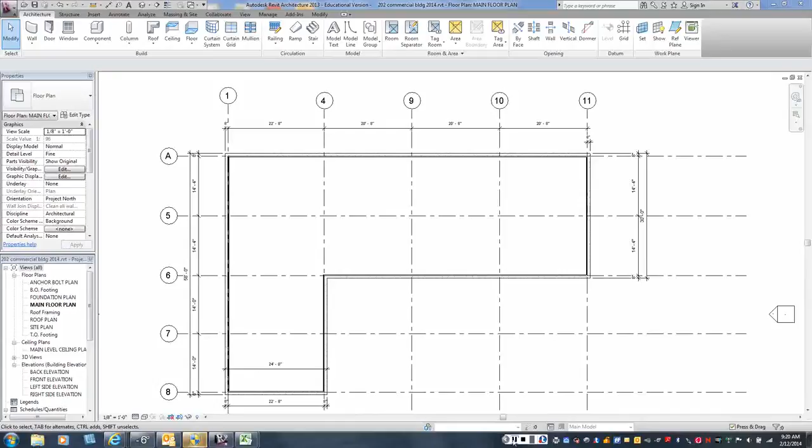We're going to talk today about creating your height elevations on your building. And we talked about the building being modular, so it's masonry construction, so we have to be modular on an 8-inch increment horizontally, right? And we have to be on an 8-inch module going vertically as well. So let's just look at maybe an elevation of our building.

And right now, mine defaulted to these numbers, okay? Saying that level 1 was the main floor plan, and my roof was set at 12'8". I don't know what yours defaulted to, but let's see, does 12'8" work out on an 8-inch module? Yes, okay? You could divide 12'8" by 8 inches, and you would come out with an 8-inch module. So let's say that that is the height of our building. Let's see how that would work backwards to come up with a ceiling height.

So what kinds of things on this type of building do we have to take into account as far as how much lower would the ceiling be than that? So it's a masonry building with a flat roof, right? And when you look at flat roof buildings around, you don't see the roof at all, right? Because the roof is actually lower than the top of the wall. There's what's called a parapet, right? Everybody knows what a parapet is? It's when the exterior wall extends above the roof. That's a parapet. So let's assume commercial construction, what ceiling height would you recommend?

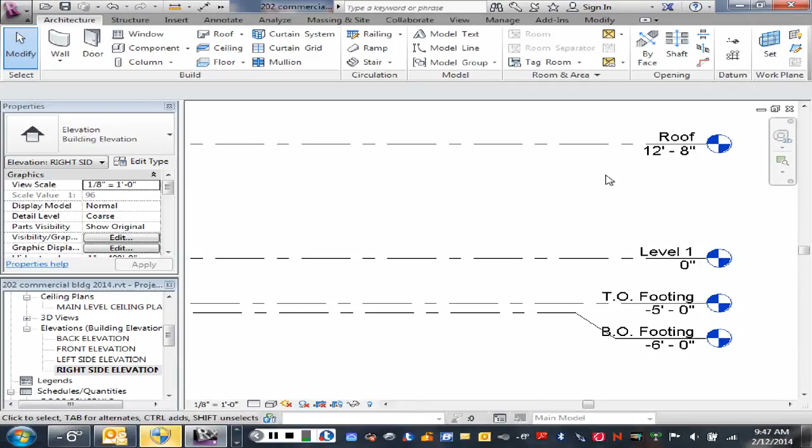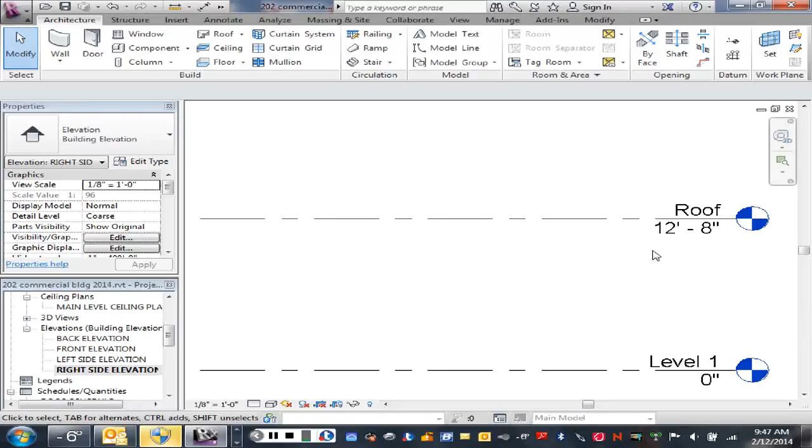Okay, so let's just assume that we're going to have a ceiling height of 10 feet. That would be a suspended ceiling like we have here. And then above that suspended ceiling, we're going to have our structure of our building, which are steel beams and bar joists and things like that, right? So we'll be looking at that here in a second. Okay, so at this point, we'll say that at a minimum, your roof's going to be at 12'8". That leaves us, from a 10-foot ceiling, 2'8" to incorporate steel beams, bar joists, a roof system and a parapet wall above the roof.

Okay, so this is an example of what your structural cross-section sheets could look like. So you'd have a main cross-section through your building over here in the upper right corner, and then a blow-up of the exterior wall where it meets the roof over here. So, like I just mentioned, if our overall wall was 12'8" to the top of this exterior masonry wall, then the things that are getting covered up are the steel beam that has to be incorporated into the wall between columns, and then the bar joists that sit on top of that beam. Now, steel bar joists are different than wood joists, in that they are typically top chord bearing bar joists. Okay? So they hang off the top of the beams.

And we'll talk about that more when we get to drawing our sections, but the height of the bearing point of a bar joist depends on the depth of the bar joist and the length of the bar joist. But for this building, due to our less than 30-foot spans probably, that height of that bar joist bearing is going to be 2.5 inches. That's pretty common up to a 30-foot length. And then once the lengths get longer than that, that height starts getting bigger. It might be 4.5 and 5.5 and so forth. So at this point, we'll assume that that height's going to be roughly 2.5 inches above the steel beam.

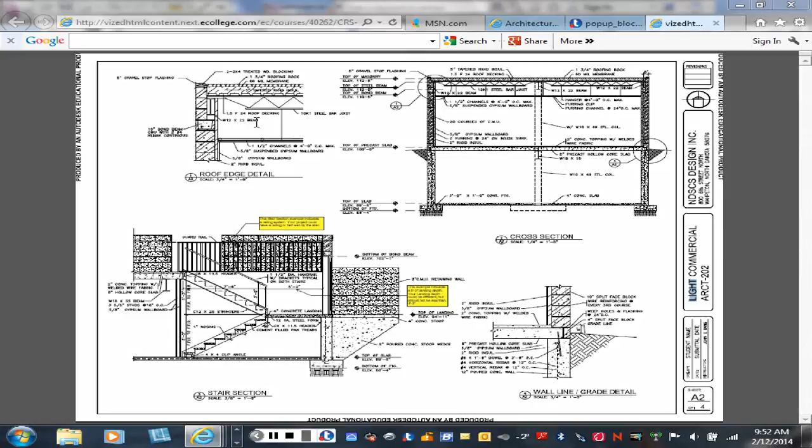So for the purpose of drawing your floor plan, let's assume at this point that our roof level is going to be at 12 foot 8. That'll give us our roughly 10-foot ceiling height. And some of you may have decided to raise the center part of the building or even go to a 2-story, you'll have to create a higher level, obviously, right? So let's go back and look at our plan a little bit.

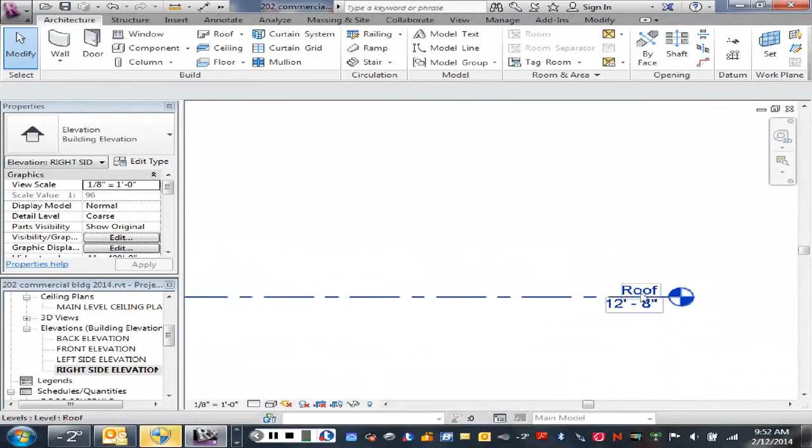And let's say that, dealing with like the sketch I created yesterday on the board here, I wanted to raise that center part of my building, which was right in this area here. I'm going to go over here and I'm going to click on that name roof, and I'm going to say roof-1 maybe, okay? Because I'm going to put another roof a little bit higher.

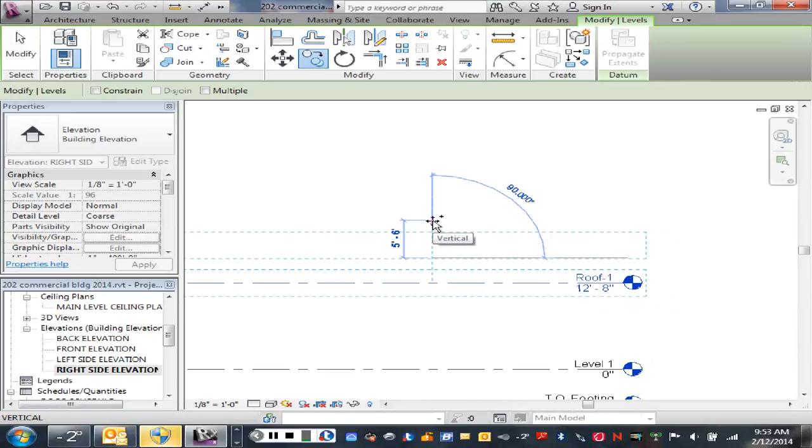So then I'm going to click on this level and copy it, and I'm going to say I want it up, we'll say 5 feet higher than the other roof. Okay, and that automatically will default to roof 2. Okay, and it tells me that it's 17.8 above the other one. So at this point I just guessed at what that should be.

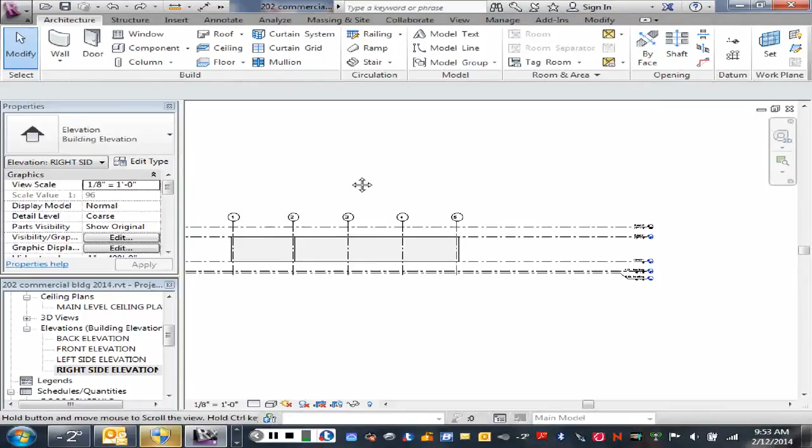After zooming out a little bit and looking at it, whoops, undo that. After zooming out and looking at that, I can kind of tell that's probably a little bit too tall. It's probably going to make my building look a little too tall, so I'm going to change that probably to maybe 15.8. And that would be more appropriate for my building, but your buildings could all be a little bit different.

That would be the level of, let's say you're going to put a standing seam roof or a sloping roof up there. That would be the height of the low end of that roof, and it would peak up above that. Okay, so that would be the bearing point of the trusses or whatever you're going to have on that upper level. Okay, any questions about that? Okay, let's go down then from this level down.

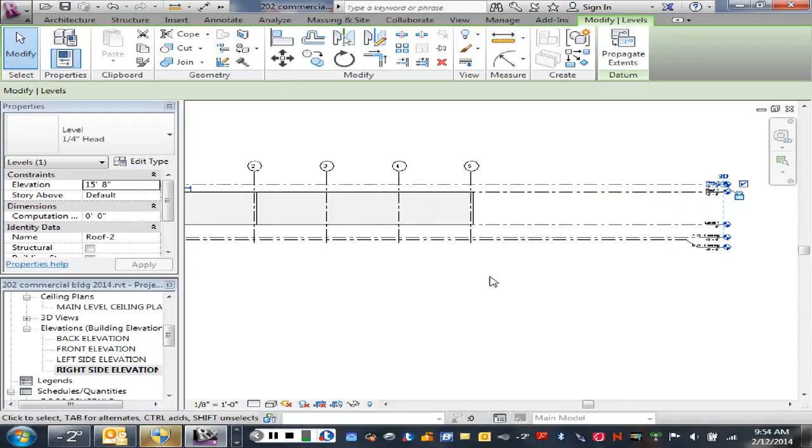We talked about putting a basement in this building. And if we put a basement in this building, it's commercial construction, so one option would be, again, to go with bar joists and beams and put a metal deck on that and then pour a concrete floor on top of that. That's one option. The other option is to go with precast concrete planks. You all familiar with precast concrete planks? Probably talked about that in your methods and materials class a little bit. Okay, so we're gonna opt for that.

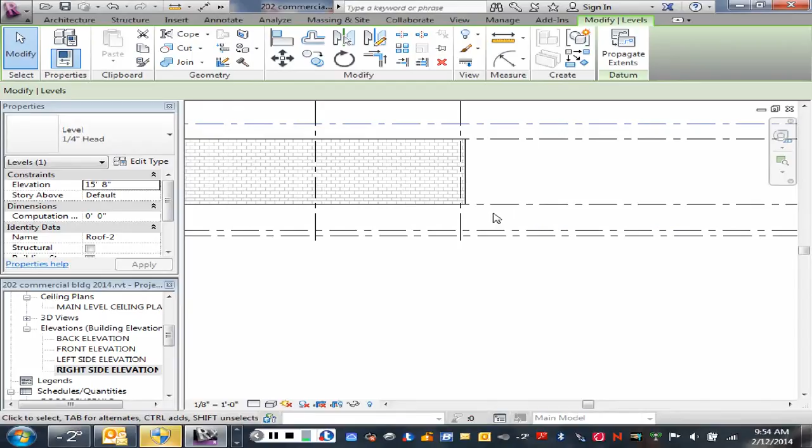So we're going to say that our precast concrete planks are going to be 8 inches in depth and thickness. Okay, with an 8-inch precast plank, we can span up to about 30 feet roughly. But again, we can look that up and find that information out. With precast concrete planks, you're going to be required to have a topping of concrete over top of that because the planks are irregular on top. So you're going to have to pour a topping on top of that to level them out.

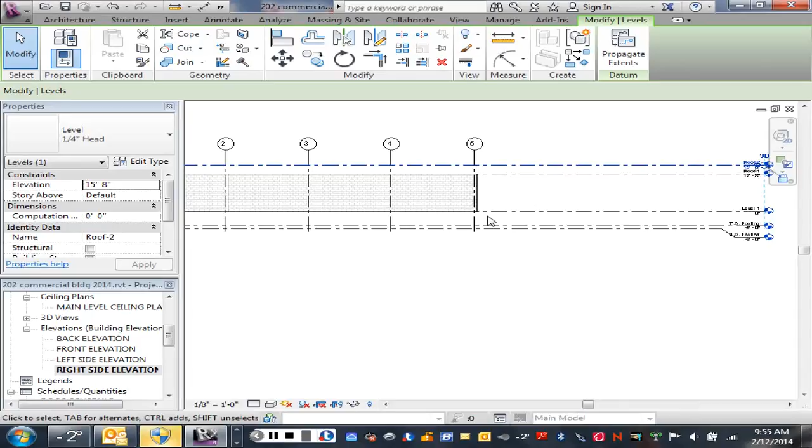So level 1 will be the height of our precast. We'll pour topping on top of that, which is going to be 2 inches thick. Now that might affect our ceiling a little bit. Maybe our 10-foot tall ceiling now became 9 foot 10, because of that. That's not a big problem. We can solve that later.

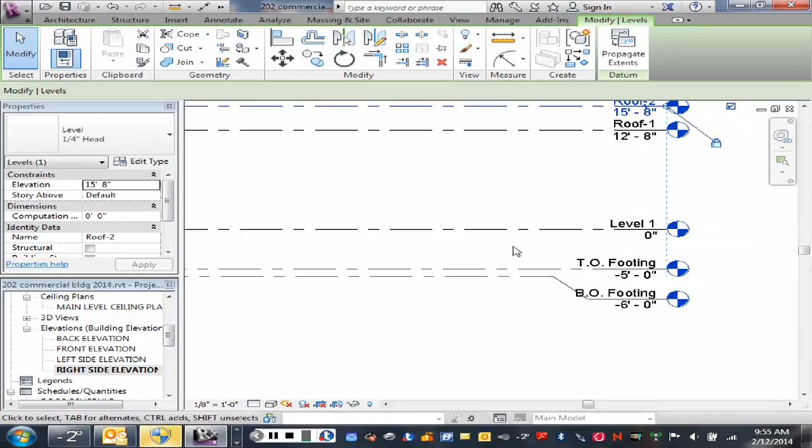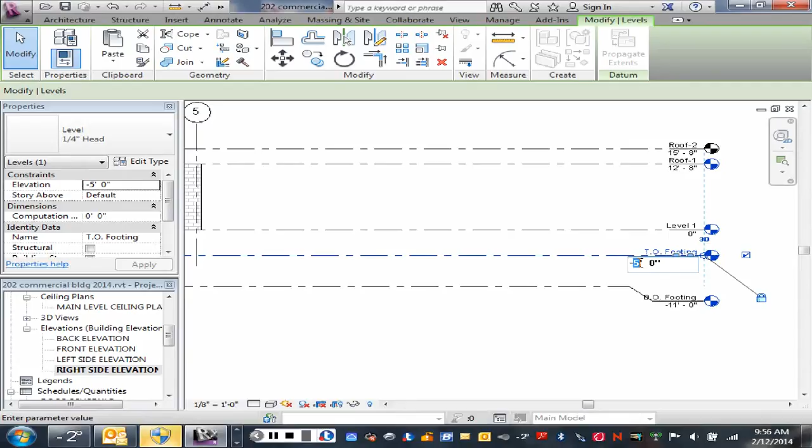Okay, down in our basement, again, because it's commercial, I want to lower that basement. I want that basement to also be roughly 10 feet tall. Okay, so I'm going to lower this footing depth first off. I'm going to drop that down to minus 11 for now. And then I'll take the top of the footing and make that 10. Okay.

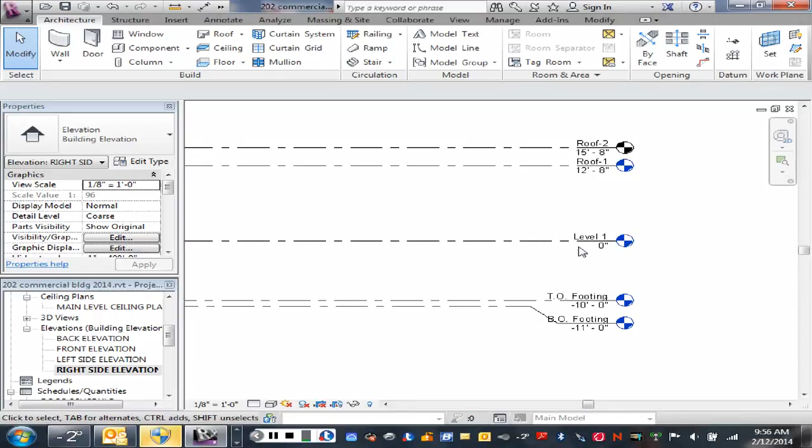Now my top of my footing is 10 foot below the top of the precast, right? The precast is 8, so now we're 9'4" to the bottom of the precast, and now I got to add a 4-inch floor in here, so now I'm 9 foot with my basement ceiling. That'll work. So okay, we'll make the top of footing at minus 10 feet, and the bottom of footing then at minus 11 at this point.

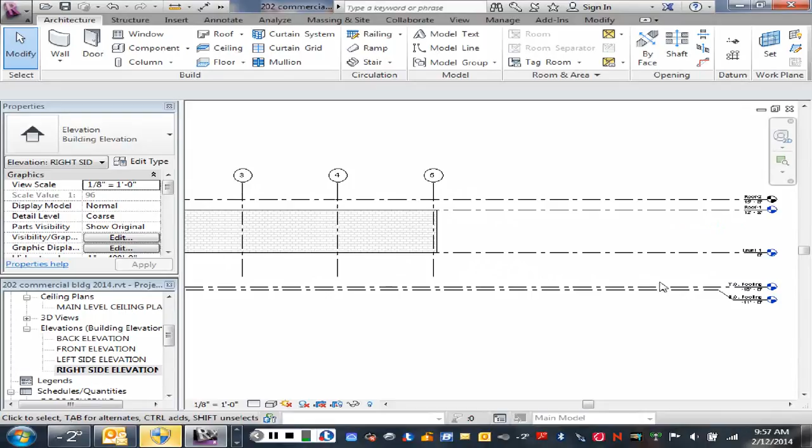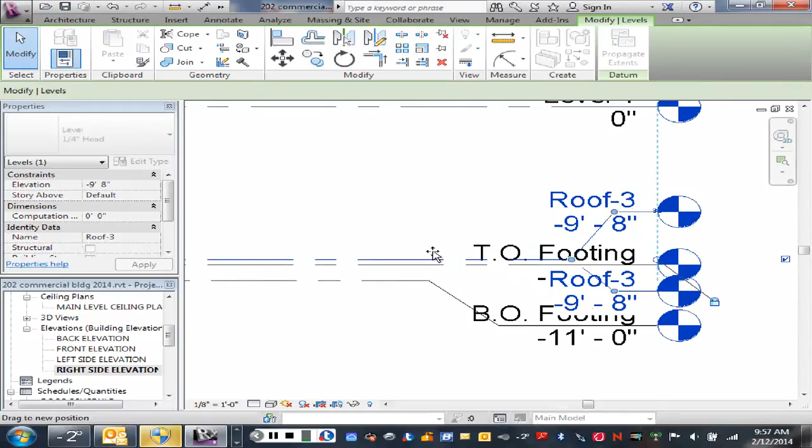So if we want to put in another level that is the basement floor, we could put that in. So we could take this top of footing one, copy it up four inches, put a break in it, bring that break up, rename that basement.

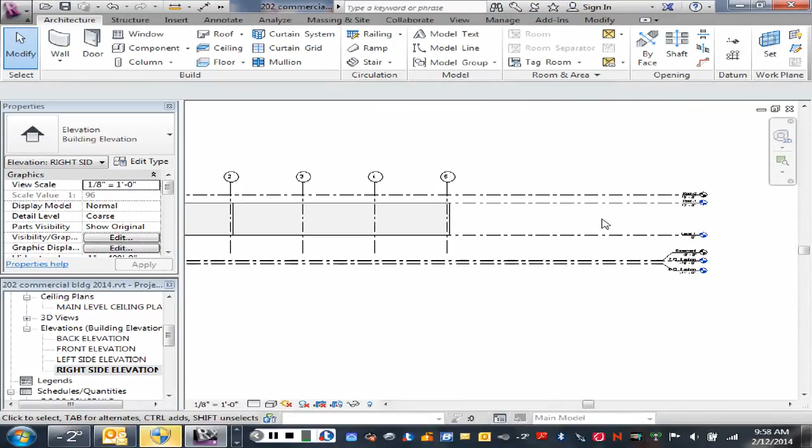Okay, and now we have those levels. Okay, so those are the heights I recommend. If you want to make some adjustments to some of them, you can, but that's the process behind doing that. Okay, any questions about that?

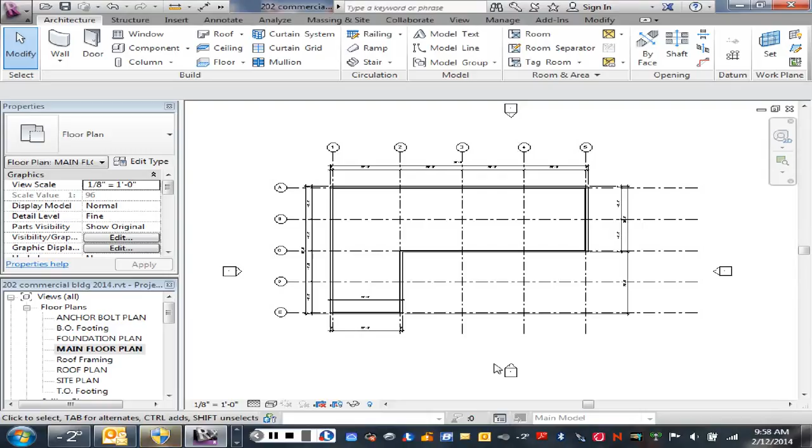Okay, one other thing before I stop here is I'm going to go back to my floor plan. And yesterday we talked about that exterior wall and about the columns being in the corners, and what the makeup of the exterior wall was going to be was 8-inch concrete block on the outside, right? Then 2 inches of rigid insulation, and then 5/8 gypsum board on the inside. Did you modify your exterior walls? Okay, so we need to make an adjustment on your basic wall that you threw in to start with.

And in this case, I created a new one that I called 8-inch masonry with furring and gypsum board. Okay, I went to edit the type, I duplicated it, renamed it, and then I kept my structure as being the 8-inch masonry, which is actually 7 5/8 actual. And then I put in a thermal layer, which is the rigid insulation, which is 2 inches, and then the finish, which is gypsum board 5/8 inch. Okay, so that'll be our exterior wall.

Okay, when we get to the top of this exterior wall, like I just talked about in the levels, we're going to switch to a thinner wall, right? So a couple ways of doing that. We can put in a reveal, right? So that 8-inch now becomes a 4-inch or whatever it has to be. Or we can bring our 8-inch masonry wall up to a height of whatever it has to be, 10 foot or whatever, and then on top of that put a different wall. So that's another way of doing it.

Sometimes the reveal gets a little messy, and you can just start a new wall up there and make it start at 10 or 11 feet off the floor, whatever it is, and go up to the 12'8" point. Another way of doing it. Okay? So I don't care which way you do that.

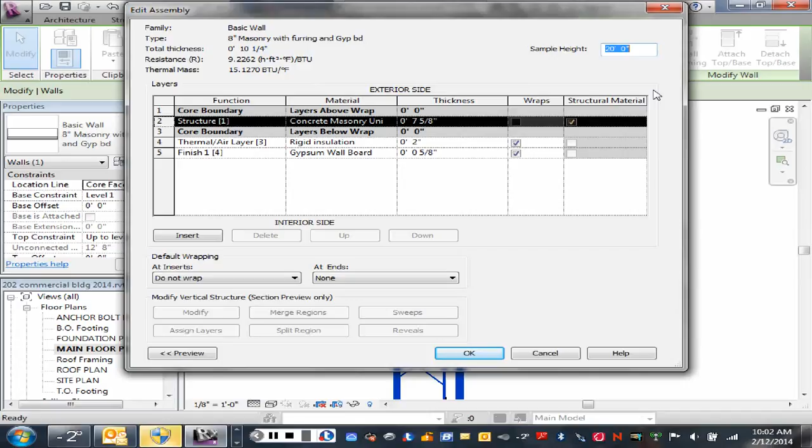So that's going to end what I'm talking about right now. So we need to work on that floor plan. Try to get that as far as we can by the end of Friday, right? Okay.